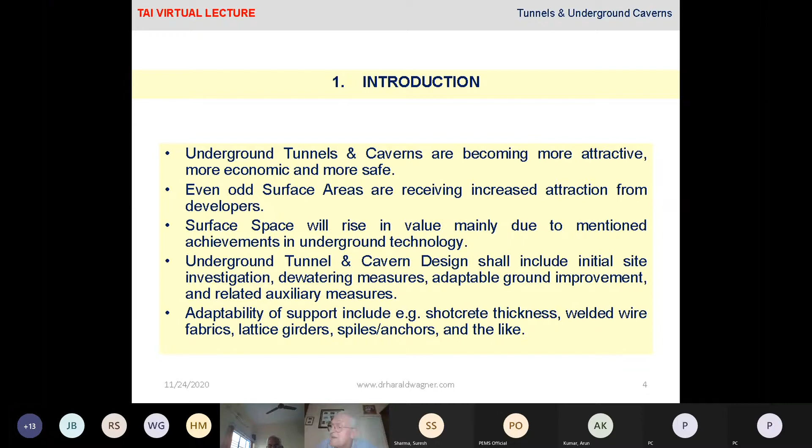So the adaptability of support includes how adaptable is shotcrete thickness, how adaptable is the use of welded wire fabric, how adaptable are lattice girders to different ground conditions, and how adaptable are spiles and anchors as pre-running support, and the like.

The next slide, please. The next slide will show you all of the different types of technologies which we apply, in one picture. Can you go to the next slide? Yes, the next slide shows—

Before we go to that, maybe we can go back one slide. Yes, now on this slide you can see in the center part the assembly of a tunnel boring machine.

All of the pressures and valves which are quite complicated in that machine. You can see also the cutting wheel, and you can see it being lowered down into the shaft. You can see conventional tunneling on display as well.

I can show you with this the conventional tunneling picture here, and that's a very large picture—that's the connection between a very large tunnel and the shaft outside. And then you can see here also boomers and all type of other shaft equipment in soil and in rock.

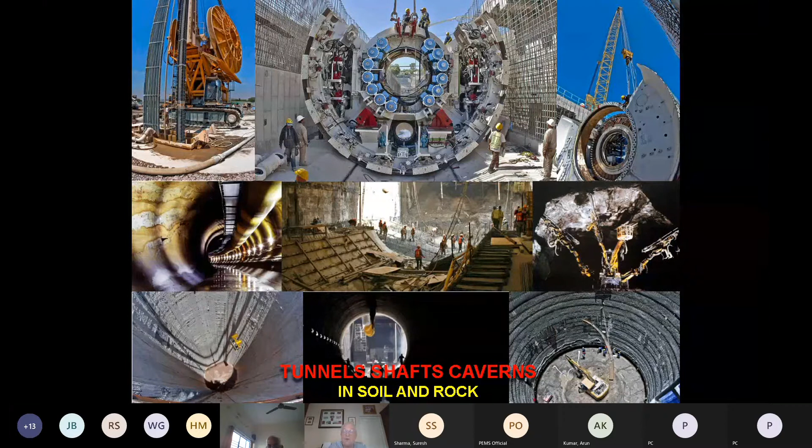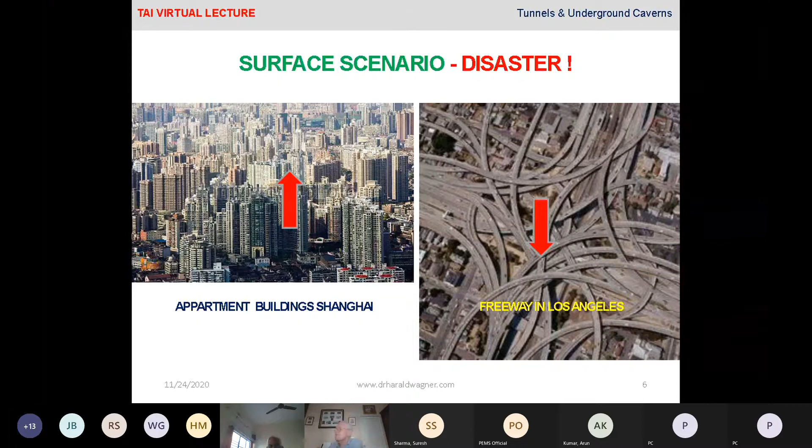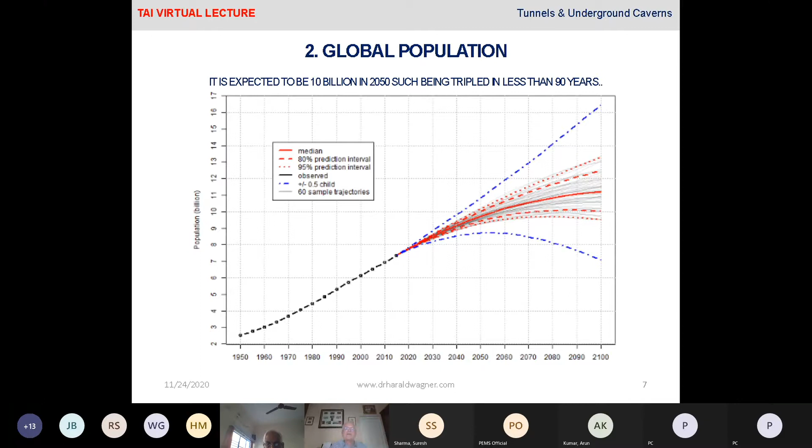In the next slide we can see a brief overview of the global population. The expectation is that the population will be 10 billion people in 2050, with the median average between these exaggerations. In fact, it means that it is going to be tripled in less than 90 years. We have predictions with 80% and 95% prediction intervals, and we also have the actually observed line here. So this is the global population.

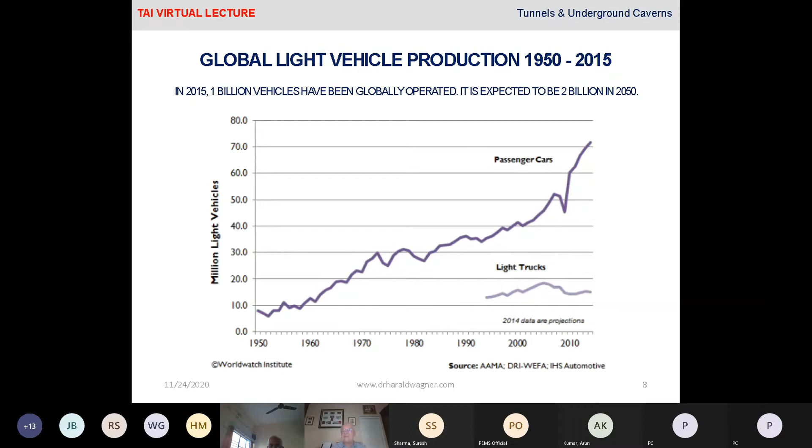On the next slide we can see a summary of the development with regard to urban and rural increase of world population. In 1975, 45 years ago, we had 3 megacities on our planet. In 2011, we already had 21 megacities. By 2045, the megacities will host 70% of the population.

At the same time, we also have an increase of the average age. From 1960, where we had an average age worldwide of 53 years, to 2010, we had an increase of almost 25%, from 53 to 69 average age of the world population.

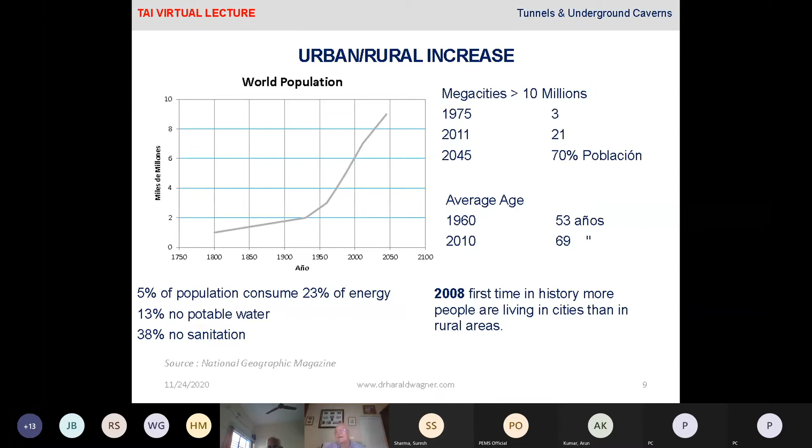In 2008, it was the first time in history that more people were living in cities than in rural areas. So we definitely have a strong shift from the rural area population to the city population, with all respective problems.

Slide number 10 is an introduction into the classification of tunnels, in particular from 3 points of view. One point of view is the service of the tunnel, and from that point of view we have road tunnels, railway tunnels, metro tunnels, conveyance tunnels, drainage tunnels, and caverns. From the point of view of location, we have tunnels in water and mountainous tunnels, shallow and deep tunnels. From the point of view of geology, we have tunnels in rocks, tunnels in soils, and tunnels with mixed face conditions, which I will elaborate on a little bit more in the next slides.

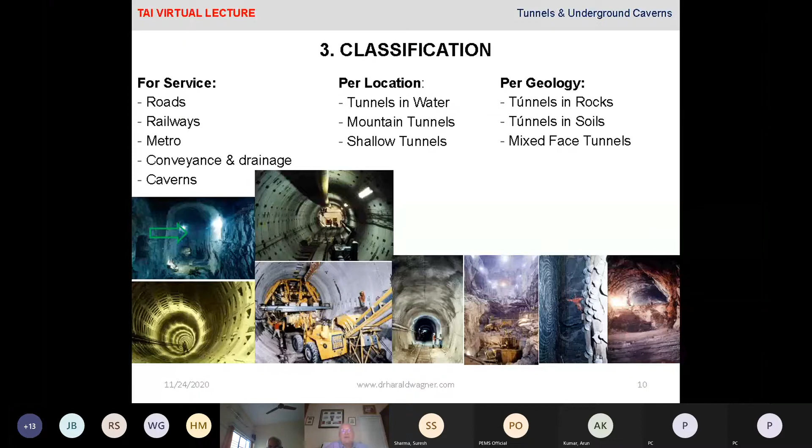Can we go back to the other slide? The rock classification. From the point of view of rock classification, we have different types of classification systems.

There is the classification system from the point of view of rock loads. Terzaghi has done a classification of rocks with that regard, from the point of view of stratified rock, intact rock, squeezing rock, crushed rock, and so on. So this is, from the point of view of rock loads, the classification of Terzaghi, which is almost 100 years ago now.

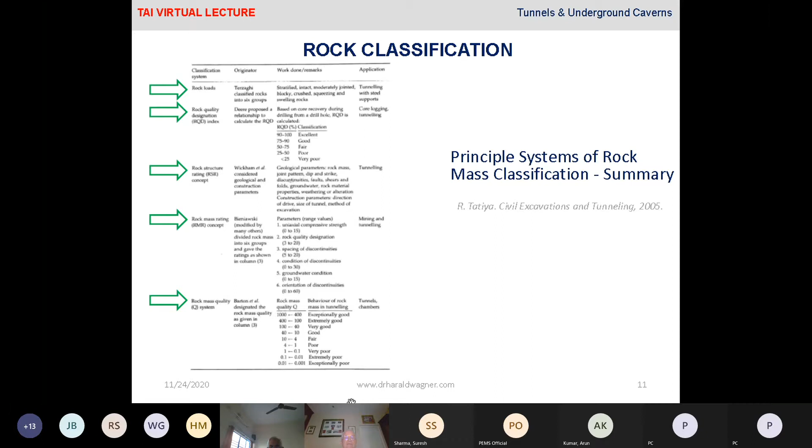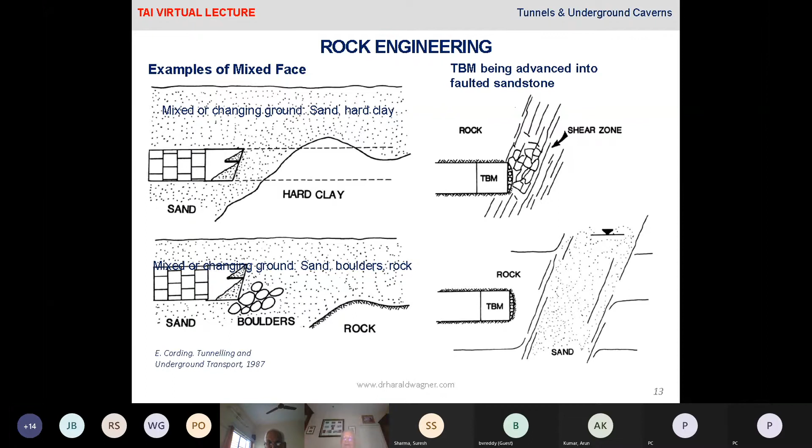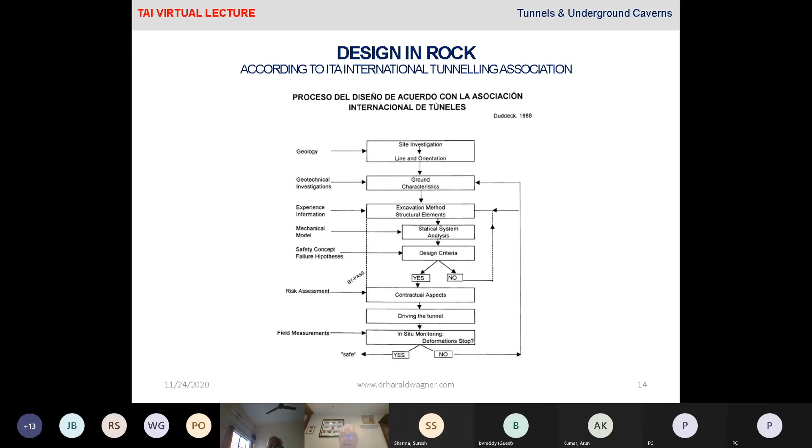Now it's again, please can't delete again. Now it has been clear, the picture. Can you try again to delete that? Hello? Can you try again? Maybe you go to the next slide, slide number 15. Yes, but can you delete the line in the middle? Hello. Yes, you did it already, but now it's again. Can you just delete the line in the middle of my slide? Could you just do one thing, sir? Three dots, three dots, the image is quite clear in our system. There is no line in between. I'm not actually happy with that, that I cannot read the slide on my screen.

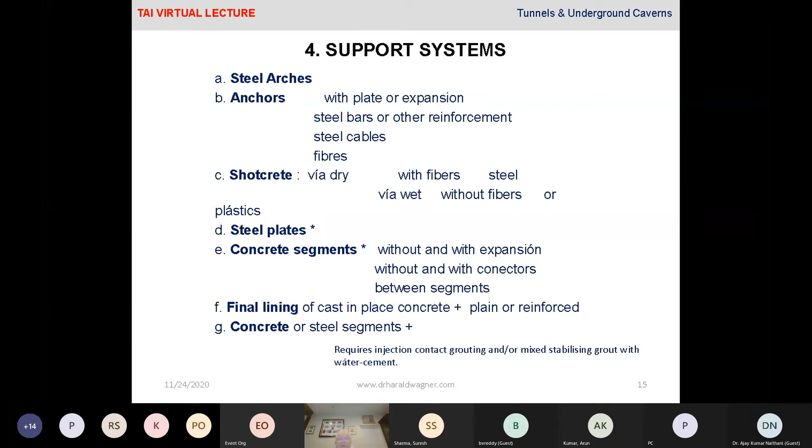Can we go to the next slide, number 16?

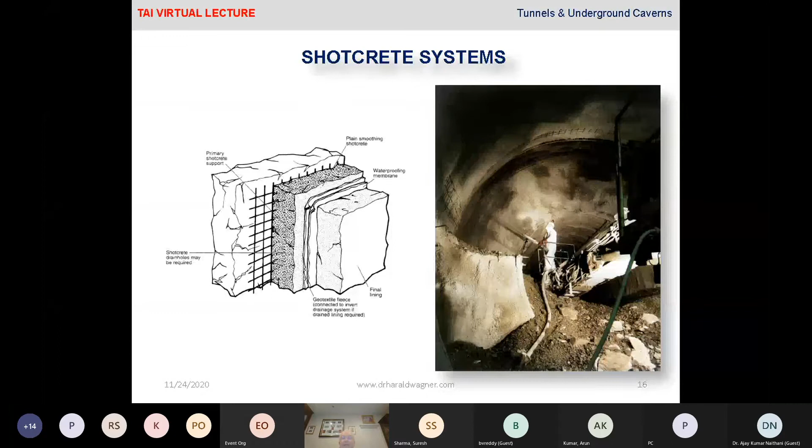Okay, next slide please.

So I would really appreciate if you could once again try to delete this line, which is covering part of my slide on my screen. Can you please try again? It's really disturbing.

Sir, could you do one thing? Please don't move your cursor from your laptop, because when you move it, this screen becomes visible and it's covering the screen on my laptop. Yes, sir, but I cannot do anything from my side. From our side it's quite clear, no problem. It's only on my side. So what can I do?

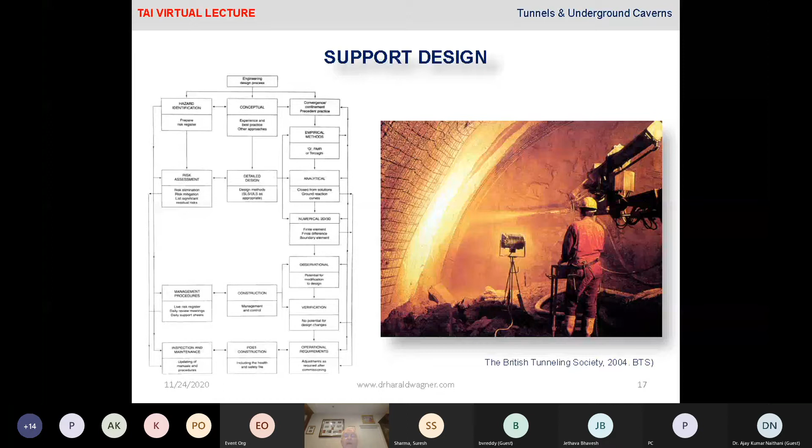Anyway, the slide is here, and you will get it. Everybody who is in the lecture today will get the same slide, it will be the full slide. Okay, let's go to the next slide.

Next slide will be slide number 18. I cannot see the slide. That's really...

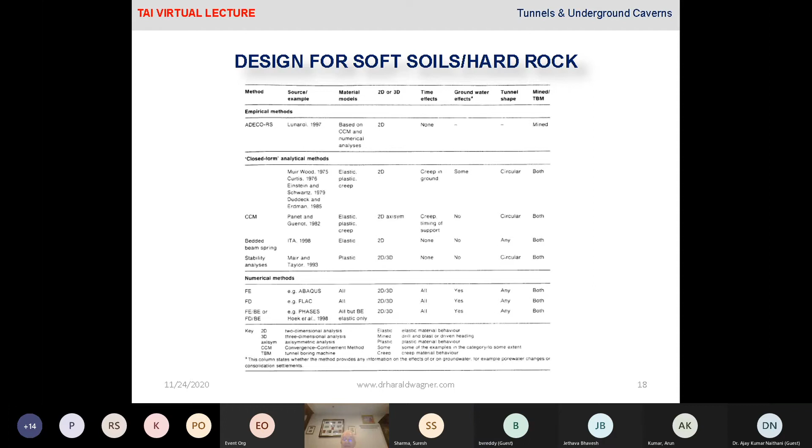Okay, let's go to the next slide. The next slide is for the design of fractured rock.

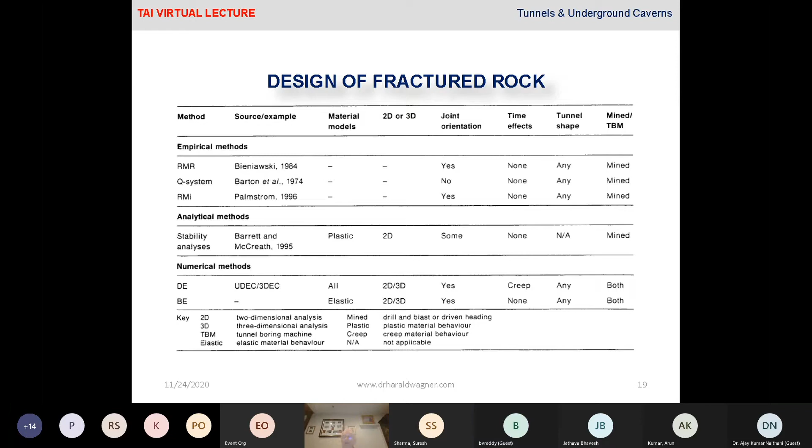Let's go to the next slide. Now the next slide is slide number 20.

I'd like to give you one of the spectacular examples of a project where we have tunnels, shaft, and cavern design, and that is the CERN project in Geneva, which provides effective expansion of urban space through this project, where we have a number of shafts, different types of galleries and tunnels, cable trajectories, and computer control caverns. It's an improvement and intensification of land utilization, effective alleviation of traffic pressure, winning an ecosystem city via energy saving, and also improvement of disaster prevention capability. We can go to the next slide, please.

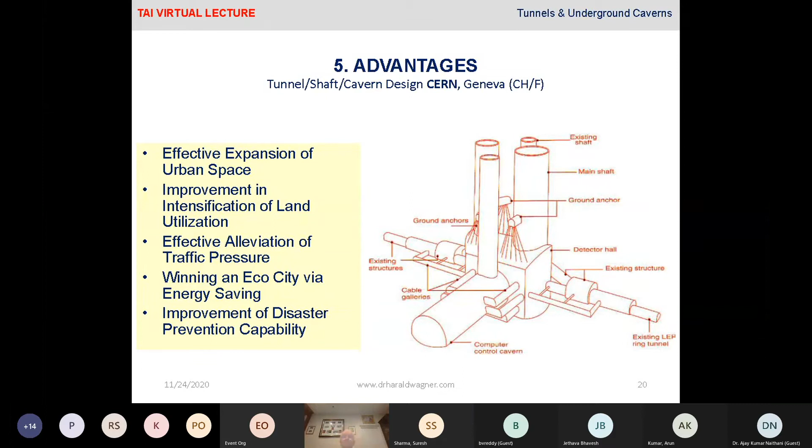Next slide. Now for a moment I had a clear slide, and now it's covered again. Can you check how you did just now? You did uncover this covering line on my slide. Can you try it again, please?

Wagner sir, I have one suggestion actually. Can you listen? It's a little bit frustrating if you cannot see. Are you listening, sir? You just did uncover, and now it's covered again. You uncovered for a moment. Sir, my suggestion: if you are having your own PPT, you can see from your own PPT, sir.

I don't know what to do. No, open your own thing. Let it be this one also, because it is only audio you share with us, and then this PPT you can see your own. No, I cannot, because I think it's on your panel. It's not on mine. Anyway, we have to continue.

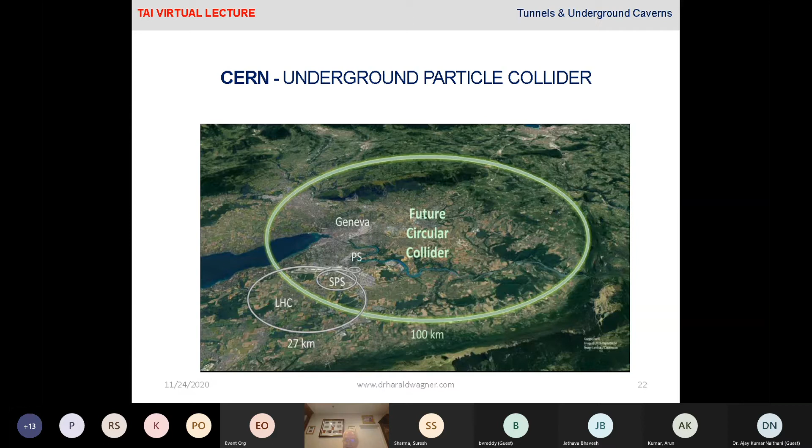Next slide, please. Yes, we have a huge demand of underground space for the future. This relates to research physics, like CERN. It relates to mass transit systems, motorways, highways, public utilities, flood control. It also relates to revitalization programs of city centers and all types of public buildings.

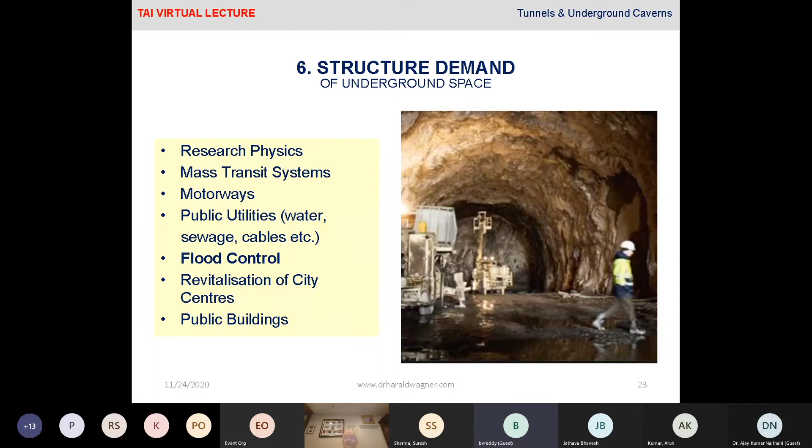Okay, next slide. Next slide is another project in discussion right now here in Thailand, in Southeast Asia, a mega flood control project with more than 1,000 kilometers of tunnels combining different rivers - the Mekong River, the Loei River, the Chi River, and the Mun River. There are a total of 17 tunnels on one branch, and another branch has a total of 7 tunnels, located in the northeastern region of Thailand.

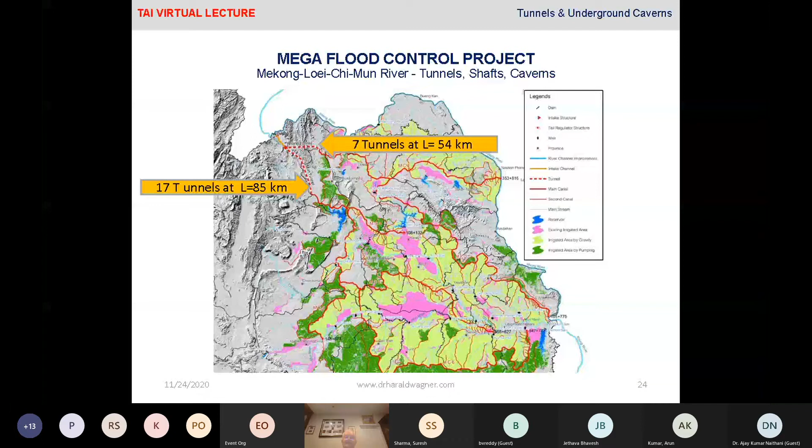Which is another mega project, yes. On this slide you can see the mouth of the Loei River at 210 meters above sea level, and all of the channels and tunnels in the northeastern corner of Thailand. These tunnels all go to the Mekong River, which I cannot see here because it's covered again.

But on your slide, you may be able to see that the flow of the water, of the diversion of the water, always goes from higher to lower level. So we provide kind of support to nature by providing this connection from the mouth of the Loei River down to the Mekong River. That's another fascinating project in discussion.

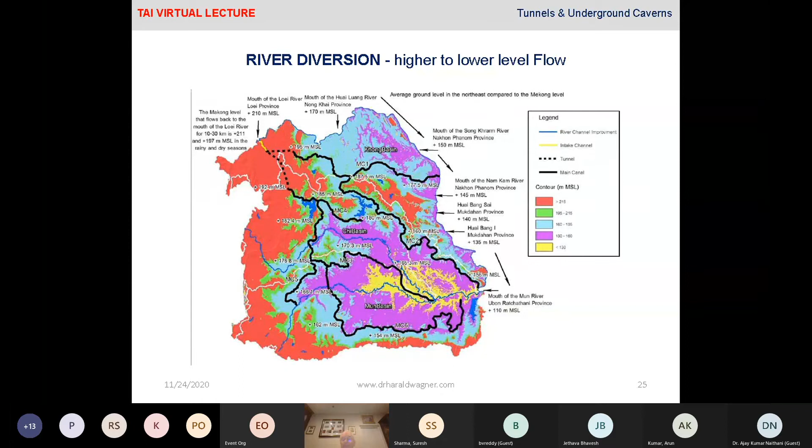You can also see here in color the different heights of the topography, where we have more than 215 meters in the brown area, between 195 and 215 meters in the green area, and the blue and yellow areas lower than 130 meters. So the flow of the river always goes from higher to lower area, providing in this area the future for agricultural use and for the population. Next slide, please.

Yes, another fantastic scenario for future infrastructure is Masdar in Abu Dhabi, a city with zero emission and zero garbage. Transportation and utilities are a major focus of the design.

You can see here the kind of axonometric or X-ray view of the city with building plots and street level, but also how the need for underground railway stations, roads, water, sewage, gas, and electricity is provided here. Basically why? Because underground infrastructure has no limits.

Underground infrastructure also has a huge potential for further development of power plants, nuclear power plants, toxic waste facilities, but also subsea infrastructure. So there is really a fascinating scenario for the future application of underground infrastructure. Next slide, please.

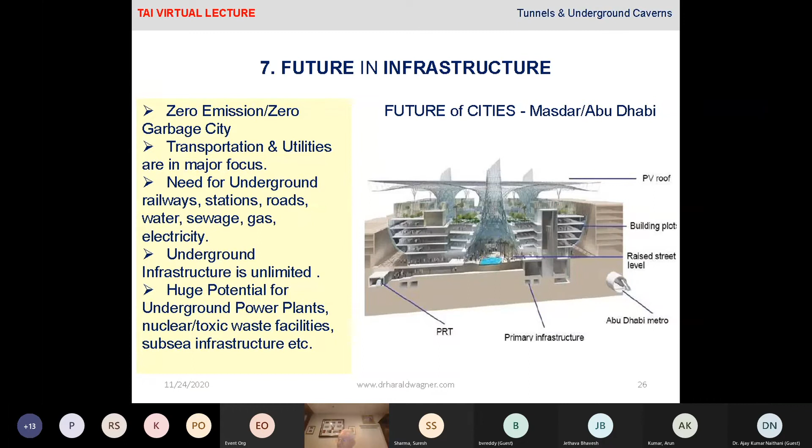What is the future of cities? The World Economic Forum's chief representative, Mr. Björkman, envisions cities as the future of our planet. In 2020, more people lived in cities than in rural areas, as mentioned before. By 2050, world cities will absorb 3 billion more people, with 70% of the population living in urban areas. This represents the biggest shift in civilization.

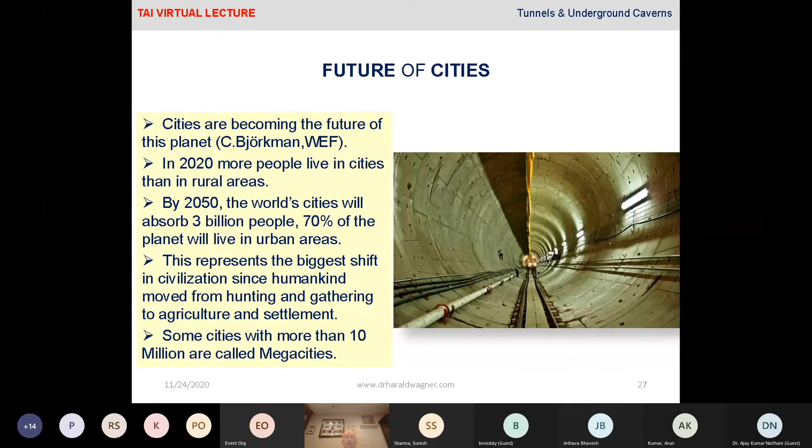Some cities, with more than 10 million people population, are called megacities. By 2050, we will have about 45 megacities on our planet. This is the future scenario for our cities. Next slide.

Now it disappears. Okay, now I have for the first time a full picture. Very happy—how did you manage that? Thank you. Now it's back again. Why is it back again? I don't know, can you manage again? Yes, okay, you did blend out my picture. No need to look at my picture. Okay.

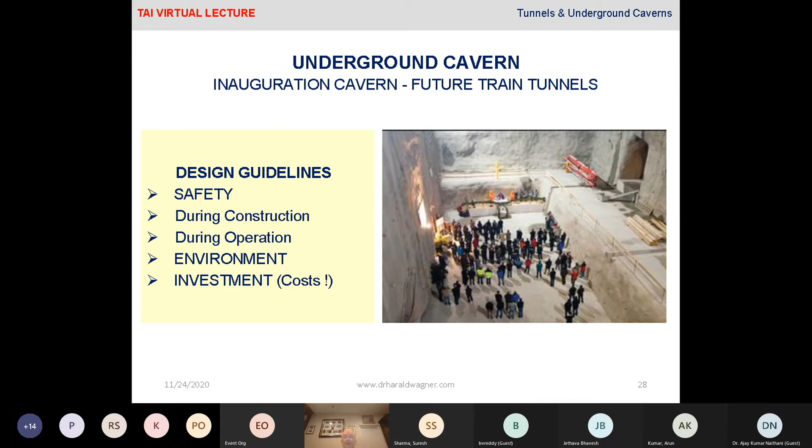The picture shows the inauguration cavern of a future train tunnel, designed following guidelines for safety requirements during construction and operation, for a safe environment, and also for cost control. Next slide, please.

I'm very happy because the slide is clean now. Slide number 29 shows all of the concerns we face when looking into a tunnel and the environment around it. These concerns relate to ground reactions, risk scenarios, the existence of nearby structures and buildings, types of structures, walkways, utilities, influences from displacement and its field, and the sensitivity to potential damages.

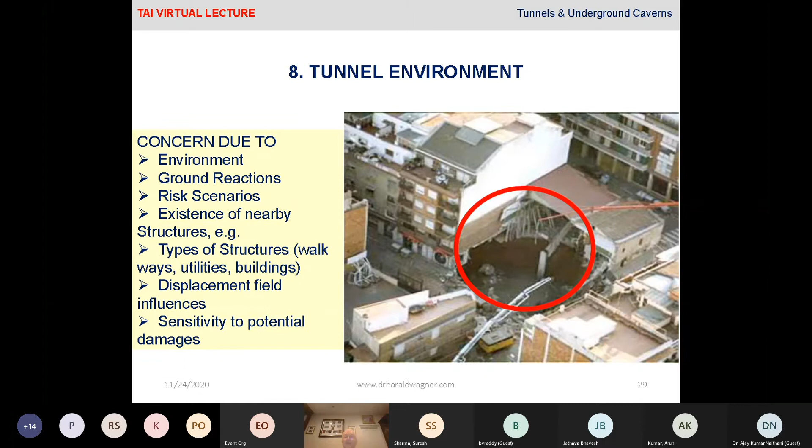This picture, with the red circle in the middle of the slide, shows the collapse of a building due to underground construction in Cologne, Germany. About 10 years ago, they did excavation under these buildings, and the knowledge about the sand-silt conditions underground was underestimated, including from the point of view of diaphragm walls as retention structures. So it all collapsed—this shows the kind of risks and problems we sometimes face in urban environments.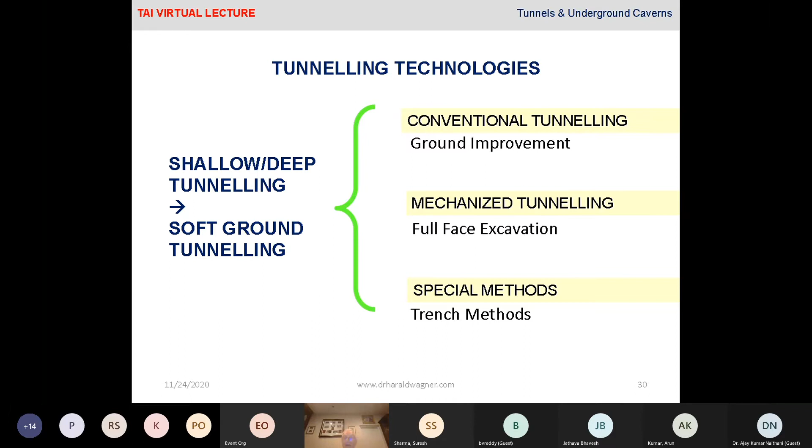Now we go to one of the core presentations of this lecture, regarding tunnel and cavern design phases. A tunnel project, following ITA recommendations for project design, is composed of these stages: conceptual design as stage 1, preliminary design as stage 2, tender design—also called detailed design phase 1—as stage 3, construction design or detailed design phase 2 as stage 4, and the geotechnical design. I will give recommendations on what each design stage should provide. Next slide.

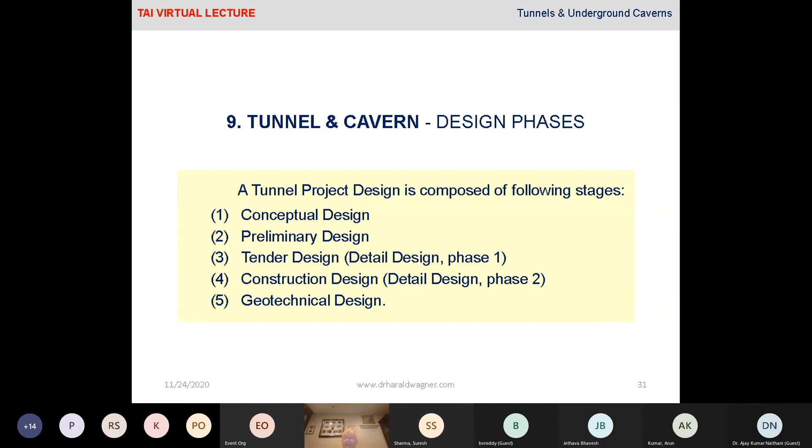This next slide shows the principles of the conceptual design. The conceptual design must include the scope and verification of conceptual design, and the selection of the preferred alignment from several alignment studies. Geological and hydrological information must be collected to develop the geotechnical characteristics. It must also include validation of the anticipated tunnel construction, including environmental aspects and based on previous experience from comparable projects, a cost estimate, the construction schedule, and—if it's a transportation tunnel—the conceptual ventilation scheme. Of course, there's no ventilation scheme needed for hydropower tunnels. Next slide, please.

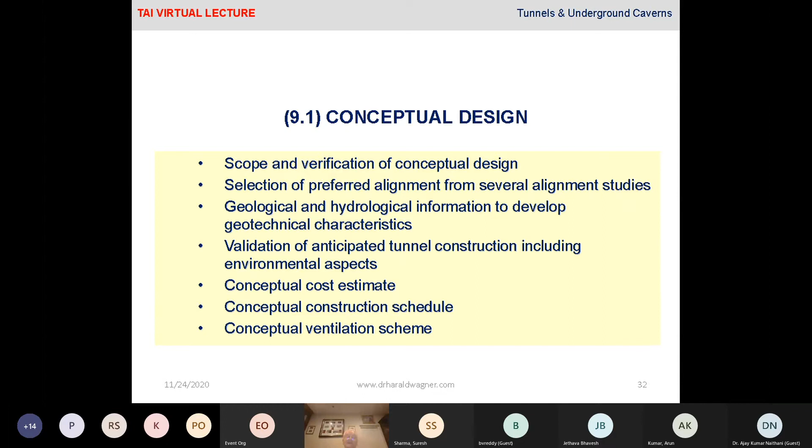In the preliminary design, what is the target? The target is to receive approval from the client. So we are already behind the conceptual design, and now we are seeking the approval from the client.

The preliminary design also has to include the evaluation of site investigation and laboratory test results. We have to evaluate these, and as mentioned in lectures before, this results also in the geotechnical baseline report. It has to identify the portal locations and portal structures.

If there is a transportation tunnel, in the portal structure we always have some sort of control building. Then it has to develop the typical cross-section, for whatever use of the tunnel, as part of the preliminary design. Then the waterproofing, if there is waterproofing, and drainage concepts, both during construction and in operation.

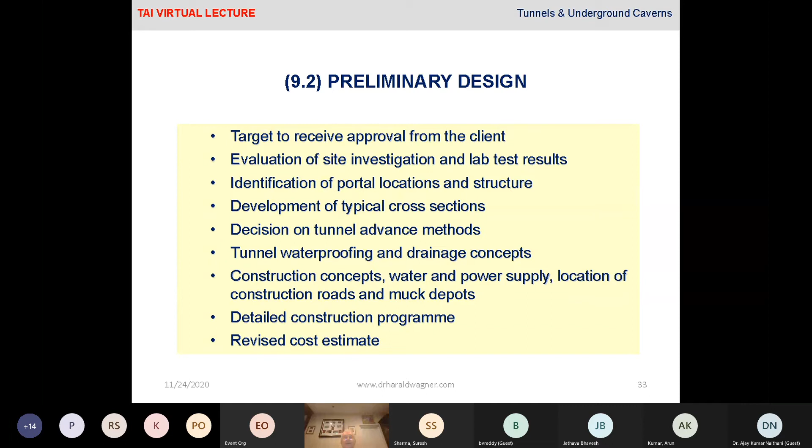This revised cost estimate is the one which mostly goes to the public authorities, and therefore it is a very sensitive issue to have a good construction concept, because otherwise it may be looked at as a source for corruption.

Next is, after the preliminary design, the tender design. The scope of the tender design is to detail the works in such a way that a more exact pricing of each work item becomes feasible.

So the tender design includes what? It includes the detailed design of all structures and incorporates the latest project development. It results in additional site investigations, if necessary, and any requirements by the client, by the authority, by the owner of the project.

It also has to update the geotechnical prognosis, the prospect of the geotechnical conditions, the support measures, the drawings, the distribution of the support classes, of the rock classes, what kind of rock engineering we are doing, the detailing of auxiliary construction methods, meaning ground improvement, dewatering, and so on, and the provision of information as required by the national standards and guidelines.

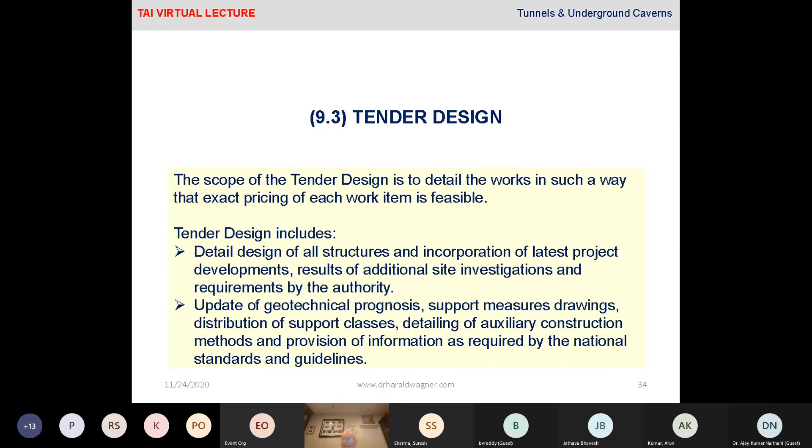That is something which is very different between different countries, so we have to correspond with the national standards and guidelines.

Slide number 35 is the construction or final design. The scope of the construction design is the detailing of the work described in the tender design stage in such a way that it can be constructed. We also have to do something which we can construct, and we cannot do something which is not feasible.

What is included in the construction design? It includes the adaptation of the detailed design to the particular requirements of the excavation and support methods selected for construction, and to the geological and geotechnical conditions encountered in situ on the construction site, with a particular aim at conventional tunneling contract conditions found on site -- conventional including mechanized tunneling contracts also.

This final design has to produce the design drawings which are used in construction, for example the formwork drawings, the reinforcement drawings, the schedules, the fabrication drawings, and so on. So all this is to be included in the construction or final design.

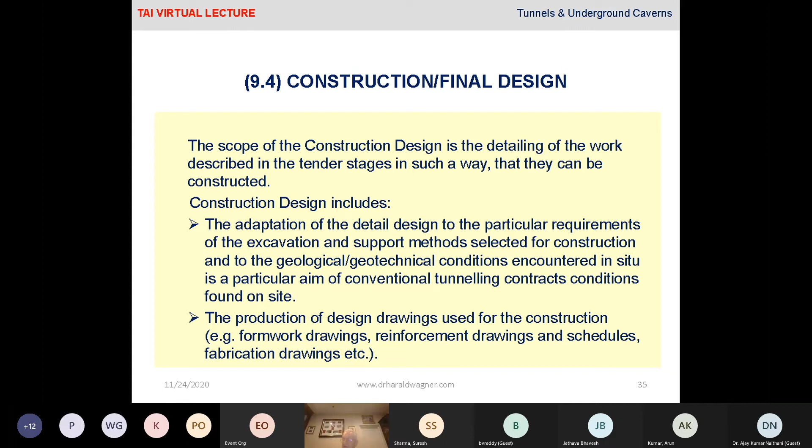Next is the geotechnical design in design. We have a geotechnical design in design, and we have a geotechnical design in construction, which is an accommodation of the design in construction. So the design has to contain the baseline construction plan.

This baseline construction plan describes the expected rock mass conditions, the assumptions, and the boundary conditions the design has been based on. The plan also has to contain a clear statement describing which measures cannot be modified during construction, as well as the criteria for possible modifications and adjustments during construction.

So this relates heavily to the flexibility of the contract model. As I told you, in one of the future virtual lectures we will talk about contract models. This is a major issue: what criteria we have for possible modifications and adjustments.

Just to give you an example: if we have a class 5 design for a road tunnel, and in the class 5 design we have the distribution of the rock anchors in the design, and then in fact we are running into the real conditions on site, and we see that the deformations are exceeding the ones which we have expected.

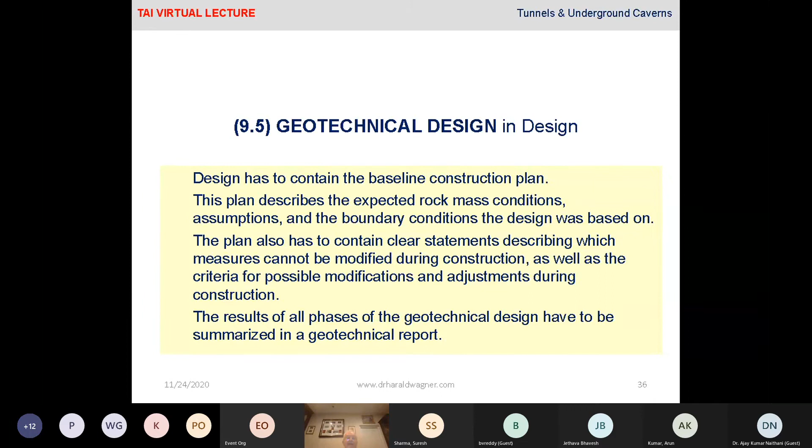Next slide is slide number 37, geotechnical design in construction. In construction, excavation and support measures have to be decided based on criteria laid out in the baseline construction plan and the safety management plan. This is an update of the geotechnical design in design, now the geotechnical design in construction.

The geotechnical design and the baseline construction plan have to be continuously updated based on actual conditions and findings on the construction site. The geotechnical relevant rock mass parameters have to be collected, recorded, and evaluated in order to determine the rock mass type. The rock mass type and the geotechnical baseline report have to be adjusted according to actual conditions in construction. The monitoring data together with the rock mass type will allow the rock mass behavior type to be determined.

I would like to come back to that difference between rock mass type and rock mass behavior type. The rock mass behavior type follows the performance of the contractor during construction, while the rock mass type is defined in the geotechnical baseline report and is the responsibility of the authority or the owner of the project. So the rock mass behavior is determined by the construction company.

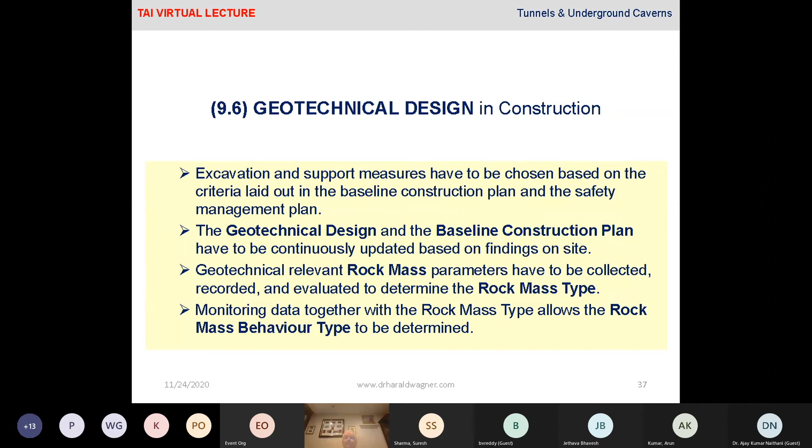Next slide, slide number 38. This I call the design work progress.

The work progress is defined by the initial site investigations, by the dewatering measures which need to be adaptable, meaning I have to adjust the dewatering measures to the actual conditions of the groundwater during construction, and by the adaptability of the ground improvement. The ground improvement needs a special sub-project, where we adjust ground improvement measures according to the conditions we are faced with on site, and other possible auxiliary measures.

Also, work in progress involves the adaptability of the ground support. For instance, the shotcrete thickness, the arrangement of lattice girders, distance between lattice girders, type of lattice girders, weight of lattice girders, structure of lattice girders, and so on, and also the type of spiles and anchors.

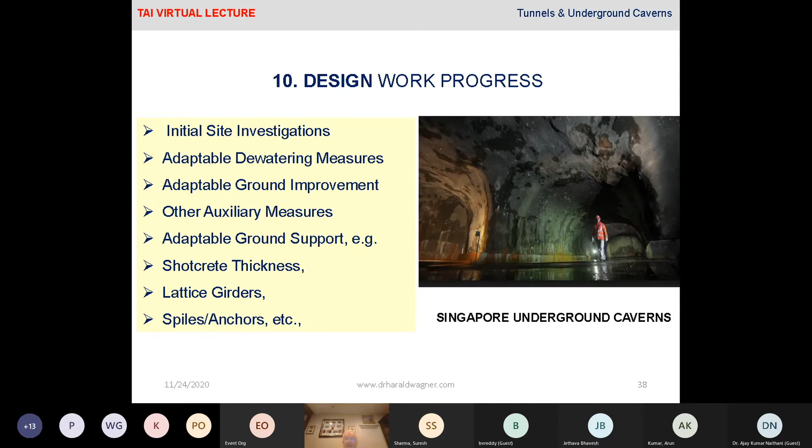This picture on the right side shows one of the Singapore underground caverns for the storage of crude oil, which is a very important project. It's also a mega project in our neighborhood in Singapore.

The importance of observation and monitoring. So what do we monitor? We monitor settlements, we monitor buildings, we monitor deformations, using sliding micrometers, inclinometers, or other types of instruments.

We monitor lining deflections, we monitor stresses in the lining, we monitor pressure cells, and we monitor groundwater as well.

This right side picture shows the collapse of a road while underneath the road there had been an excavation, and this has happened again and again, in particular in areas where we have asphalt roads or sometimes concrete roads, placed on soft ground, in particular with the influence of groundwater. So this kind of monitoring is very important, and this type of collapse happens again and again.

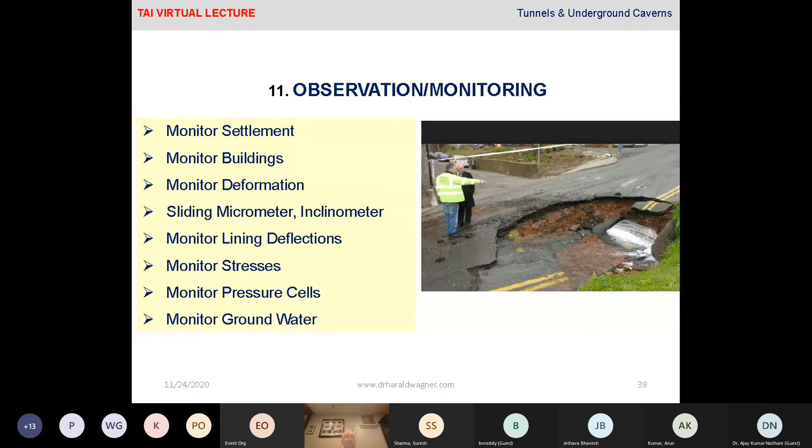Next slide, slide number 40. We are close to the end. So what are design constraints? Design constraints can result from conditions of shallow overburden, and from conditions of existing nearby structures.

Design constraints can also result from foreign objects in the ground. We have heard about bombs which were placed during the Second World War, and then forgotten. Forty or fifty years later, we come with some underground infrastructure and find foreign objects in the ground.

We can also have design constraints from legal restrictions, from auxiliary works, and sometimes from the sensitivity and high visibility of possible damages.

This project on the right side shows the so-called Silvertown Tunnel in London, connecting two metro stations on each side of the river. So lots of design constraints have been identified in this project.

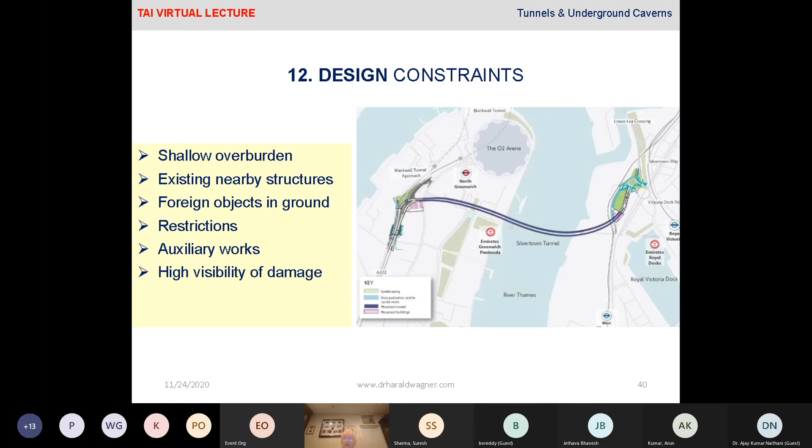Yes, this is a final lining, and we call it usually a summary. This shows two pictures. One is the metro line number 7.

In Mexico City, I have been a consultant for this metro section, line number 7, which had 10 stations, and out of the 10 stations, 9 have been all mined stations. It's a typical conventional tunneling NATM project with excavation method developed in Austria in the early 80s and early 90s of the last century.

The right side picture shows the deep drainage for the interceptor, also in Mexico, with a cast in place final lining. A typical project I've been working on for quite a long time, and I'm very happy to see the success of this project. The deep drainage tunnel is almost completed right now, and provides a huge improvement of the environmental conditions in Mexico City.

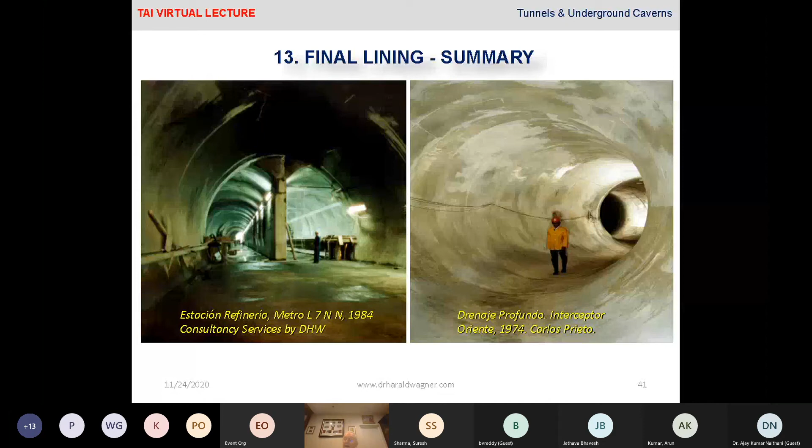Okay, thank you. I think this is the last slide, and I would just like to mention also whatever. Yeah, that's okay now also.

Whatever questions may have arisen during the presentation, I'm prepared and glad if I can get these questions right now, because we still have a little bit of time, or if you want to write them down and send them to me through the Tunneling Association of India or CBIP, I will be happy to respond in writing also. Thank you, I appreciate having this virtual lecture today.

I wish all those who could not attend today because of the COVID-19 virus well wishes and best wishes, to Suresh Sharma and to everybody else who might look into the presentation and have a question. I will be happy to give you a competent response.